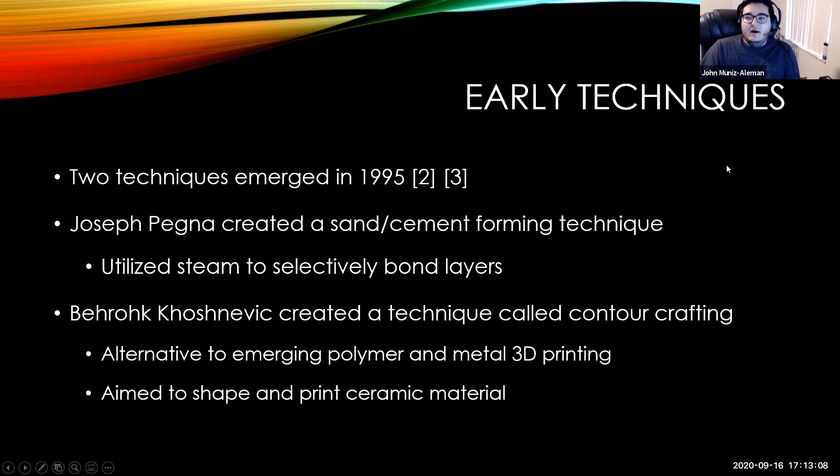Behrokh Khoshnevis instead came up with a technique called contour crafting. This came about at the time of early 3D printing with polymers and metals, and he made it as an alternative aimed at shaping ceramic material. Although he originally used it for ceramic materials, he saw its potential for material fabrication, especially for things larger than a cubic meter. It'd be a lot easier to just print something instead of making forms for, say, a building or something. So in 2000, he gathered a team at University of Southern California to begin studying how to expand the scale of his construction printing, which he aptly named 3DCP.

I have a short segment of a TED Talk from Khoshnevis in California back in 2012, in which he describes what contour crafting is. Let me make sure I share the computer sound.

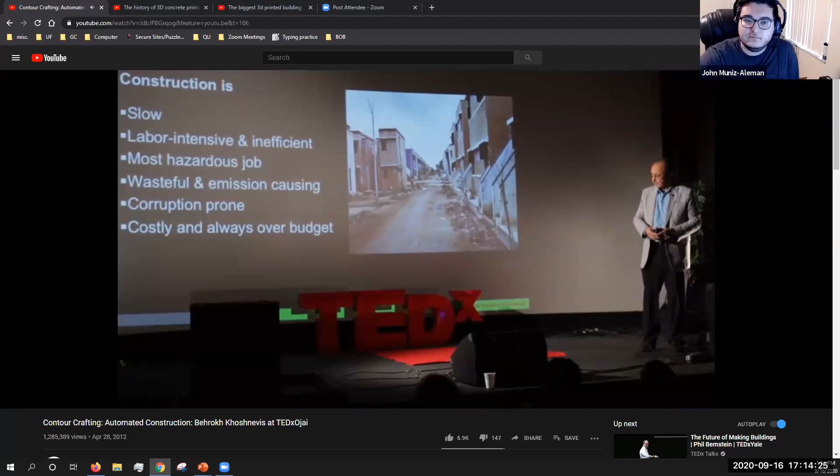There are about 400,000 injuries every year. Eventually these translate into costs to society and homeowners. Construction, the way it's done today, is very wasteful and generates a lot of emissions. And because of all the different trades involved and the difficulty of the management process in construction, the process is pretty corruption-prone. It is very costly and is always over budget. So what we have been focusing on is finding a solution to this problem.

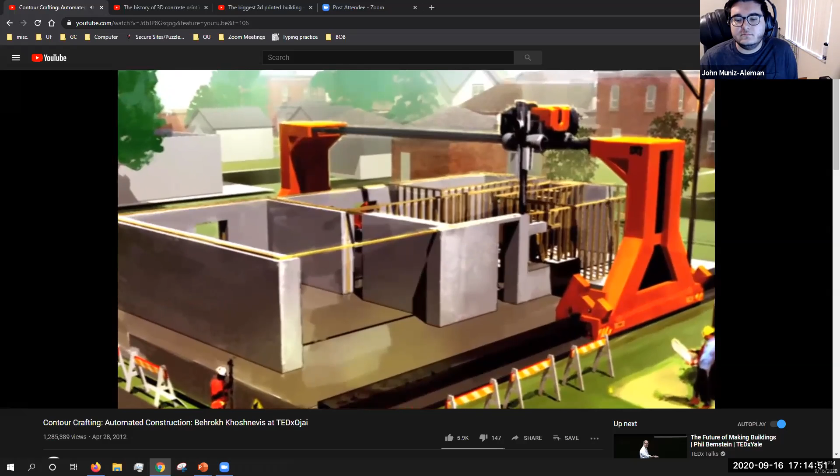Our solution basically benefits from advanced technology. I named this process contour crafting, and it is essentially a way of streamlining the process of construction by benefiting from the experience we have gained in the domain of manufacturing. In manufacturing, there's a process called CAD/CAM, computer-aided design, computer-aided manufacturing. A lot of things you see are designed on computer and, without any human interference, sent to the production machinery that automatically makes those products you use. So we want to scale up those processes and bring them to the realm of construction. This, of course, has been the desire of a lot of engineers and technologists. There have been problems, there have been difficulties in such a transition.

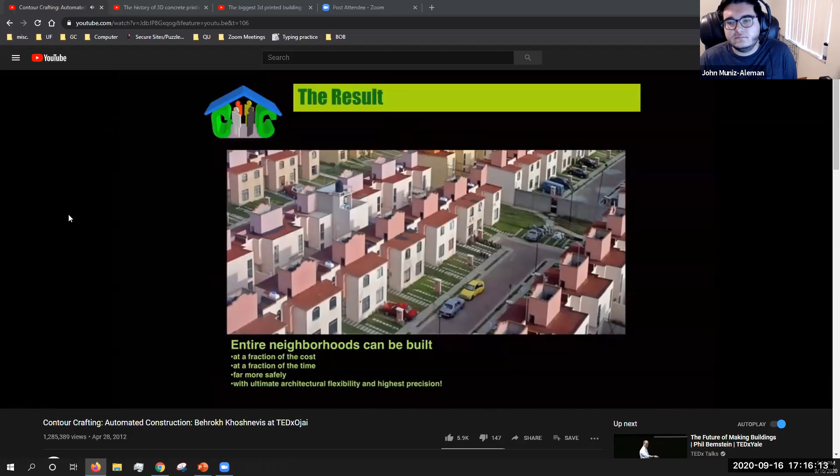Recently there has been development in the field of fabrication. You probably heard about 3D printing of 3D objects. So contour crafting is basically scaling up 3D printing to the scale of buildings. What we are hoping to generate are entire neighborhoods that are dignified, at a fraction of the cost, at a fraction of the time, far more safely, and with architectural flexibility that would be unprecedented.

So the buildings that will be built, of course, will not be as homogeneous as these. Every building can be very different. They do not have to look like tract houses because all you have to change is a computer program. The architectural design is basically sent to the machine directly.

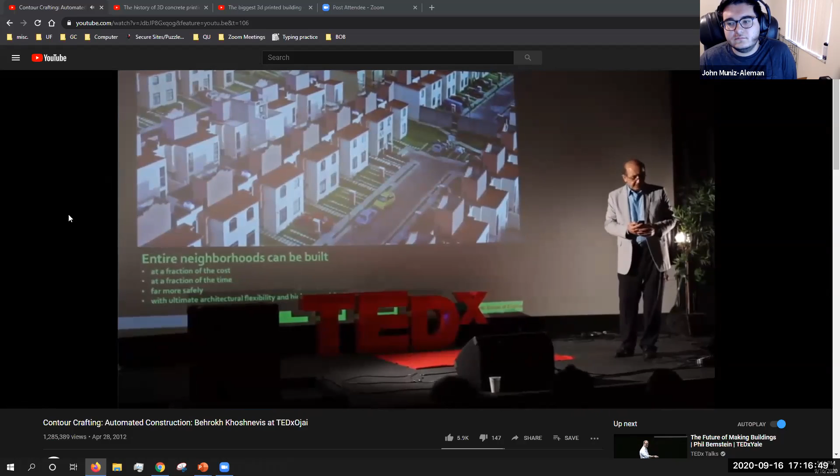This animation shows the concept. The material, which is cementitious, initially concrete, is deposited through a nozzle, and the building is built layer by layer. In the process, a lot of things can be done, including automatic reinforcement, automatic plumbing, automatic electrical network installation. And once the basic structure is done, there could be other automated processes that would do auxiliary operations such as finish work, tiling, and even painting using inkjet printers, the kind that print billboards.

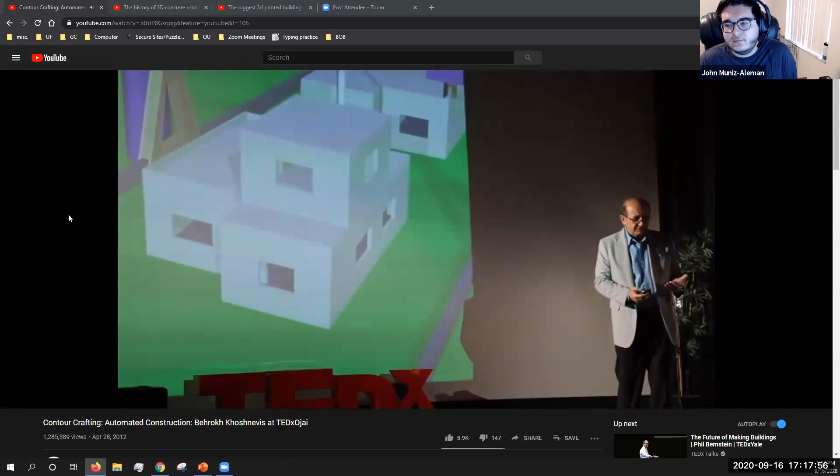So in the end, the whole building can be ready in an unprecedented time. We anticipate that an average house, like a 2,500 square foot house, can be built in about 20 hours, custom designed. The model you see here is pretty simplified because I didn't want to make the animation difficult for my students. But you can.

So I think that gives a pretty good overview of Khoshnevis's ideas on contour crafting and the basics of what 3D construction printing would be.

So, did not expect that.

Going on to the first generation of the technology actually being used: in 2003, Rupert Soar formed a construction group at Loughborough University in the UK. His group was studying how to scale up existing 3D printer techniques.

In 2005, he got the funding and was able to build an off-the-shelf printer. He used a gantry system, a generic concrete nozzle, and some motors to move it around on tracks.

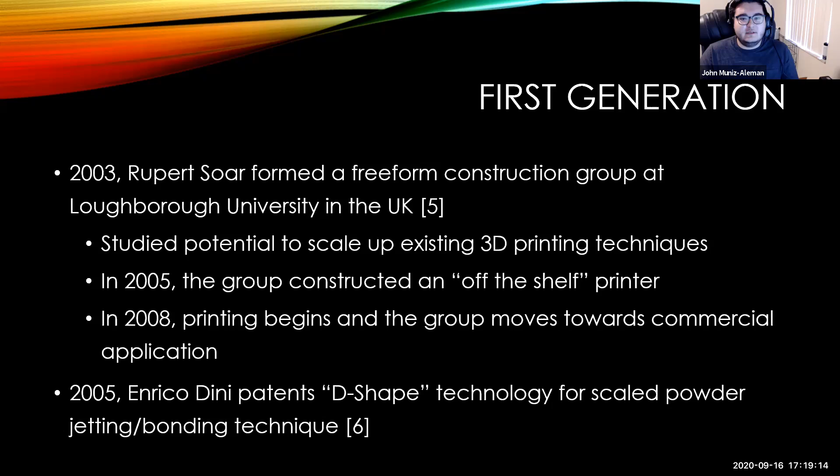Nowadays, Loughborough University was able to get a commercial grade printer, and they actually licensed it to Skanska in 2014 for use. Now all this has moved on to controlled applications and actual projects. So I have a little timeline video to summarize that, and a time lapse of the construction of an actual building. Let me get to that.

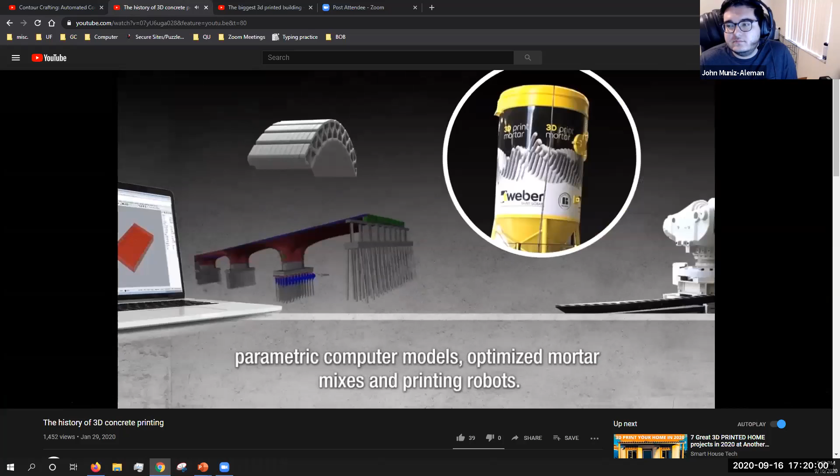Things started moving fast from there. The combined knowledge of BAM, Weber Beamix, and TU Eindhoven led to the development of parametric computer models, optimized mortar mixes, and printing robots. Shortly after, in 2017, this resulted in the world's first 3D printed concrete bridge. This 8-meter-long engineering feat was placed in Gemert, the Netherlands, and was extensively covered by media across the globe.

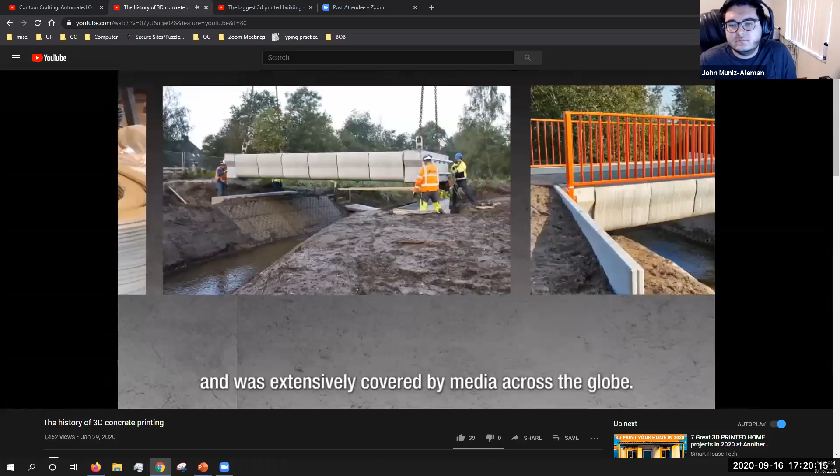No more than a year later, the equally newsworthy Milestone Housing Project was revealed, a series of 3D printed houses in Eindhoven. With this, a whole realm of new possibilities opened up for the 3D printing market.

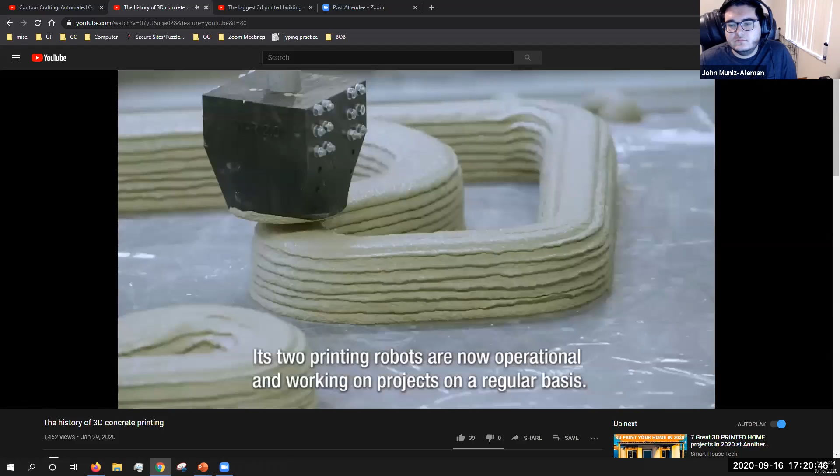Another big milestone followed in 2019, when BAM and Weber Beamix opened the first industrial and commercial 3D concrete printing facility. Its 2 printing robots are now operational and working on projects on a regular basis. In the meantime, the factory intensifies the digitization of the complete design-to-realization process. Call this process digital manufacturing.

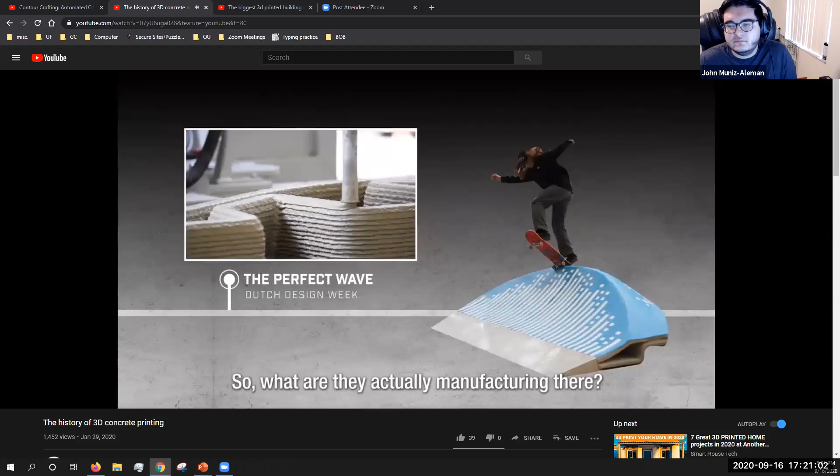So what are they actually manufacturing there? One of its more recent projects was the Perfect Wave, a skateboard ramp produced for the Dutch Design Week in Eindhoven, demonstrating how the process creates freedom for designers.

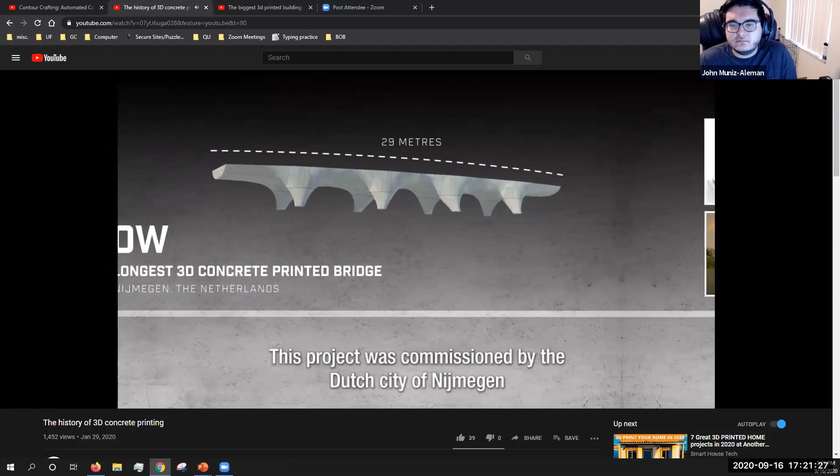Currently, the factory is working on another first-in-the-world project: the longest 3D printed concrete bridge in the world. It stretches an unprecedented 29 meters. This project was commissioned by the Dutch city of Nijmegen and designed by renowned designer Michiel van der Kley. It consists of separately printed elements which will be assembled on site - a daring and complex project which involves substantial experimenting and testing.

3D concrete printing is not just beneficial for big, audacious projects. For normal routine jobs, this technology can save substantial amounts of time, costs, and waste - like the stairs we printed for ProRail. The parametric model allows easy adjustment to each unique situation and is delivered to site as a prefabricated, ready-to-place object, or the formwork of concrete objects for the train station of Driebergen-Zeist.

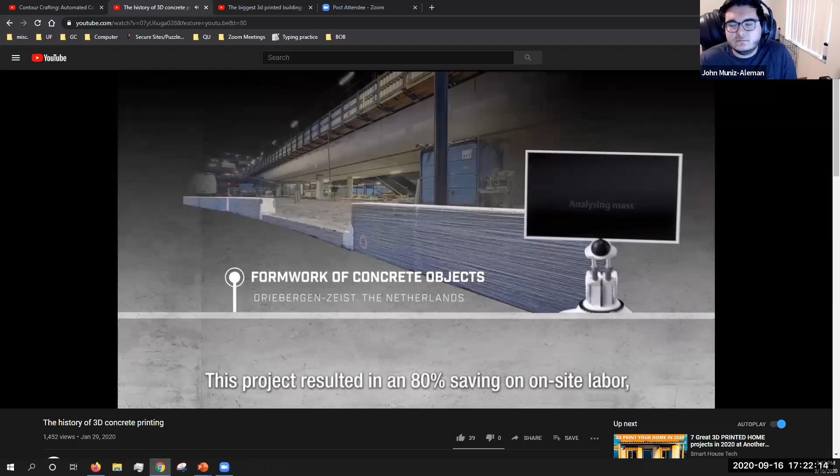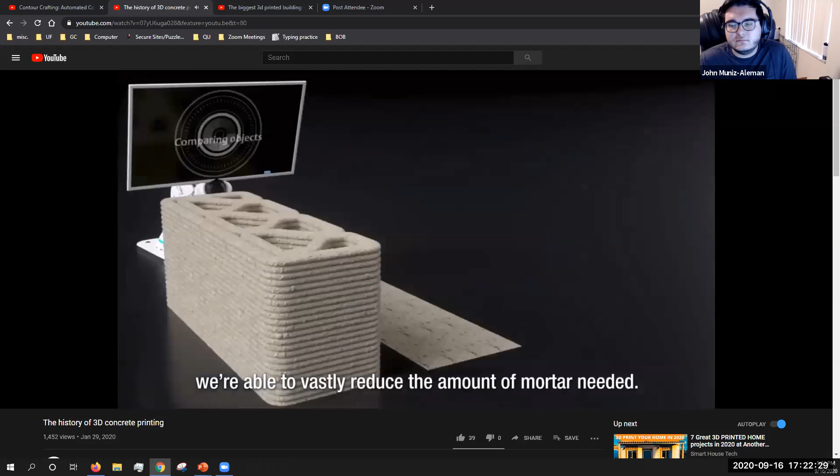This project resulted in an 80% saving on on-site labor and 60% saving on process time on site at no additional cost. Because concrete is only printed where it's needed for the construction, we're able to vastly reduce the amount of mortar needed. And since there's no more need to make molds or casts, we can minimize waste.

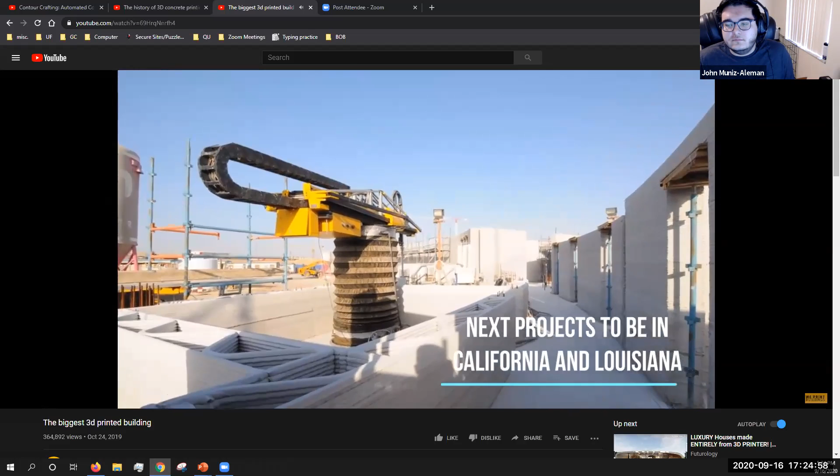So that's the end of my presentation on 3D construction printing and/or 3D concrete printing. Does anybody have any questions?

So I have a quick question for you, John. It looks like a beautiful technology, 3D printing, and also all the other technologies people have been talking about, automation, robotics. They look amazing, and from the data they could save up to 30-40% of productivity. But why does it still take so long for industries to use them? What is the major bottleneck - scalability, safety, or just pure psychology?

This technology has only really been in production for the last 10 years, so a lot of it's still being fine-tuned.

As you saw, that building in the most recent video was built by one small machine. I'm sure if you watch the rest of the TEDx talk by Khoshnevis, he introduces systems on rails with multiple extruders to scale up and build apartment buildings with multiple printers going at the same time.

I think right now it's just trying to get all the technology to where it needs to be, and the safety standards, because while 3D printing concrete is good and very quick, depending on the area—like here in Florida with hurricanes, or with earthquakes—you definitely need to make sure the reinforcements are proper, since it's not a solid block of concrete anymore, it's 3D printed and hollow. So I think it's still in the growing stages. I imagine in the next decade or so we'll see a lot more building, especially since we need to be able to build houses faster with the growing population. So that's my opinion on why it's not as widespread.

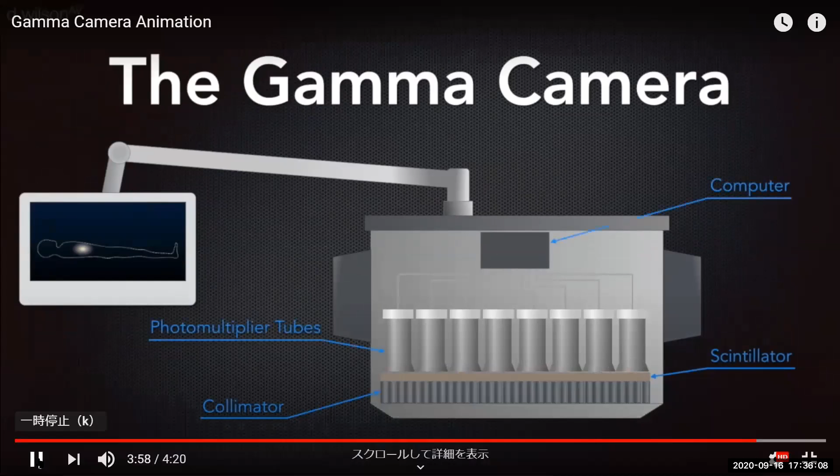So the video just showed us the general concept of how the gamma camera works, and now if we can go to the presentation—so just like gamma rays, it uses a kind of filter with some materials that filtrate these gamma rays and then translate it to an image. Can we go to the next slide?

After that—I think it's frozen, yeah—after that, the gamma camera has been commercially available since 1962, and then computers have been utilized in scintigraphic scans since 1964. Between 1965 and 1974, multiple different centers started developing their own computer programs. And after 1974, computers with incorporated nuclear medicine software packages became commercially available.

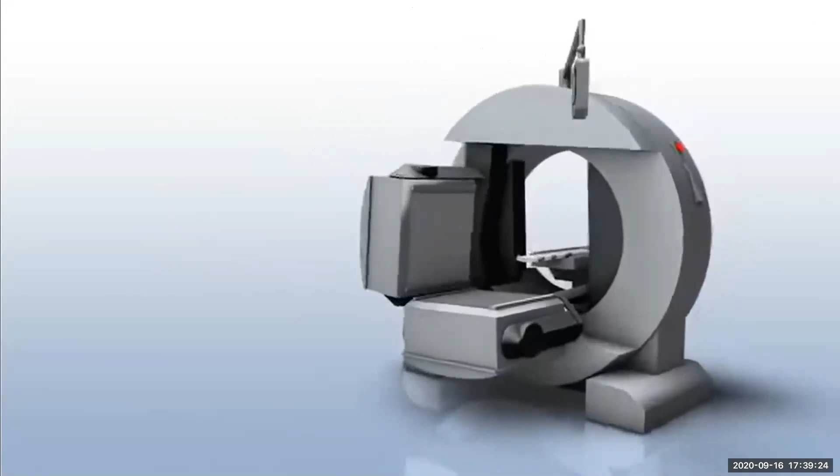If we can skip the introduction, this is the device: a gamma camera system with superb resolution and uniformity properties, making it suitable for the entire spectrum of nuclear medicine diagnostics. The robust open gantry requires little space due to its compact design and allows for high patient throughput.

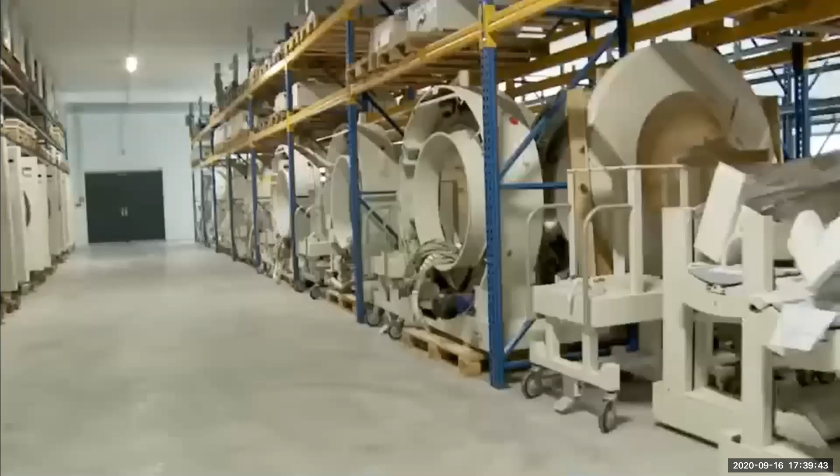The Scintron computer is a powerful data and image processing system that guarantees effective work due to its optimized user interface. The new gamma camera systems are designed in a complex process based on remanufactured equipment, new crystals, and a new computer system.

The individual components are designed for different life cycles, are manufactured, and the visible parts are painted. After the replacement of worn parts, the complete system is assembled.

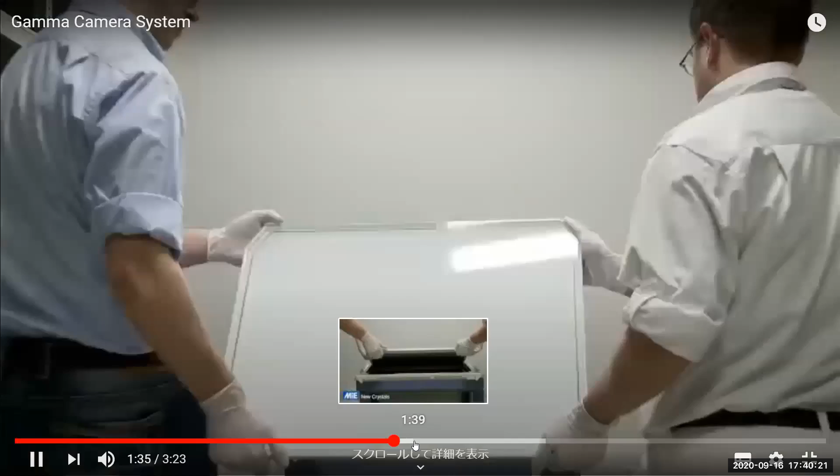The configuration and calibration of the detectors are essential for image quality. In this sensitive area, passive components are cleaned and detector electronics are tested. One of the most important steps is the renewal, which guarantees high image uniformity, using selected photo multipliers.

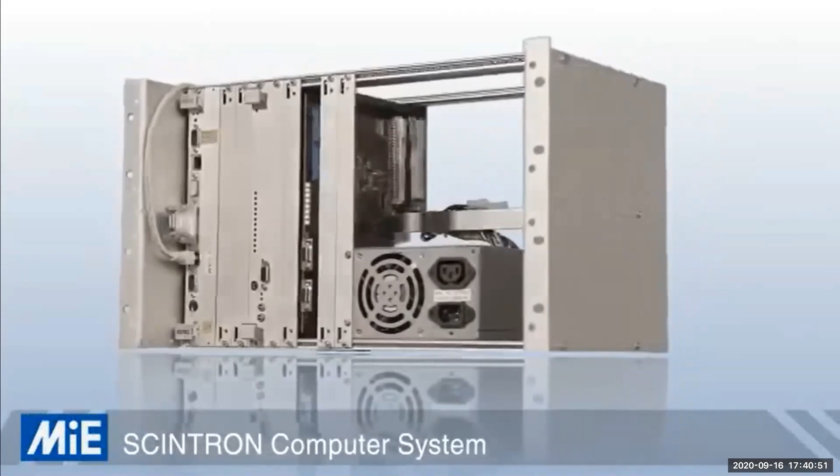Schematics, PCB layouts, source codes, and graphical user interfaces are developed in accordance with functional specifications. With the aid of these developments, the Scintron computer system controls the acquisition, analysis, and processing of image data. The entire examination spectrum can be conducted with the extensive software package, designed for nuclear medicine.

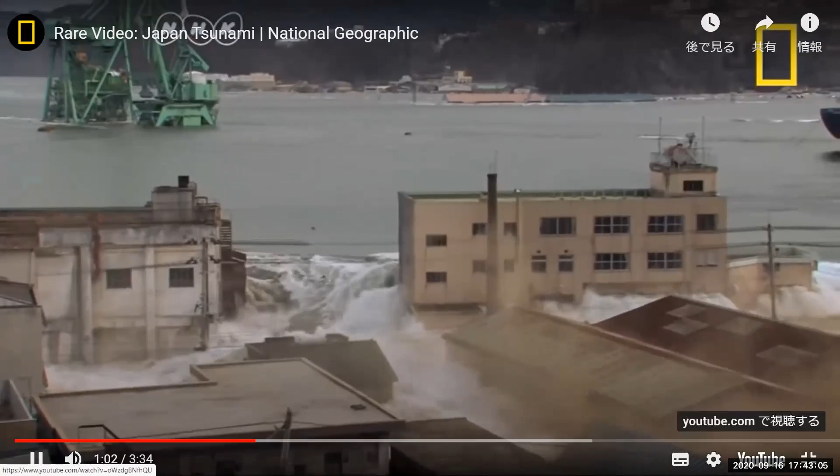Seawater cascaded over sea walls and into cities. This video shows water rushing over an 18-foot seawall into Kamaishi City. The seawall here was the world's deepest and largest, but not enough for the magnitude of the March 11 disaster. It was the largest quake ever known in Japan, and one of the five largest recorded in the world. More than 28,000 people are confirmed dead or missing.

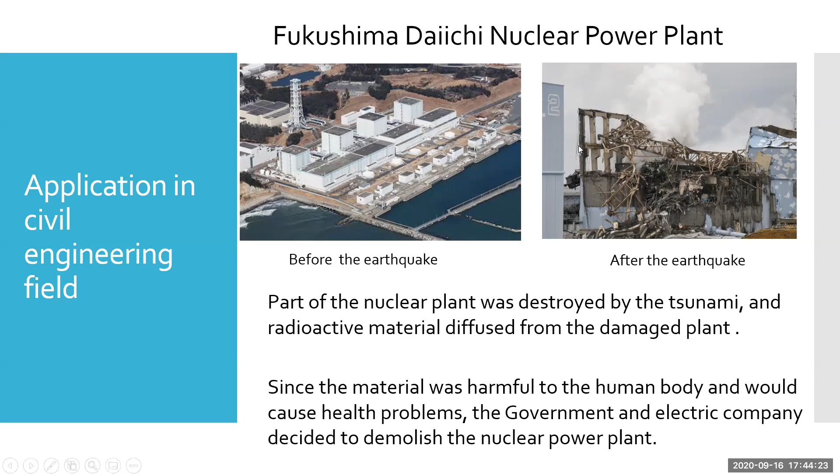So the government decided to demolish the nuclear plant. The left-hand side shows before the earthquake, and the right-hand side shows after the earthquake. The project will be long-term, like the Chernobyl disaster in 1986, due to the contamination of the buildings or area. For proceeding with the project, there are three problems.

The first is workers' health: accumulation of radiation exposure will eventually cause health problems like cancer. The second is safety: to prevent radiation exposure, workers can only do their job in a limited time. Last is management: to proceed and manage the project safely, measurement of the radiation is needed. For these reasons, the gamma camera technique was the solution for visualizing and evaluating the level of radiation in the buildings.

This is called N-Visage. It is the gamma camera which is used in the ongoing project in the nuclear plant.

The camera can visualize the level of radiation like this picture, and operate remotely and work in high radiation environments. So this is the benefit of this camera, and people can see how much the building is contaminated by

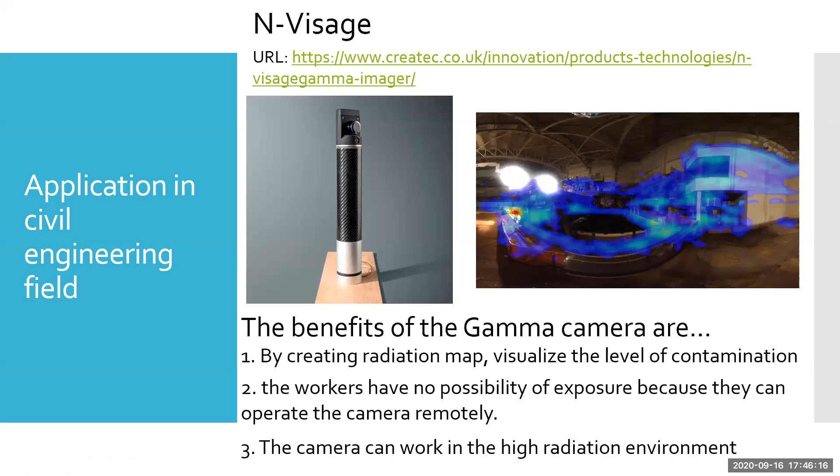radioactive material or radiation. So by combining robotic technologies shown on the video, this is a video actually working in the Fukushima Daiichi nuclear plant. The center of the image is the moving of the robot and the N-Visage.

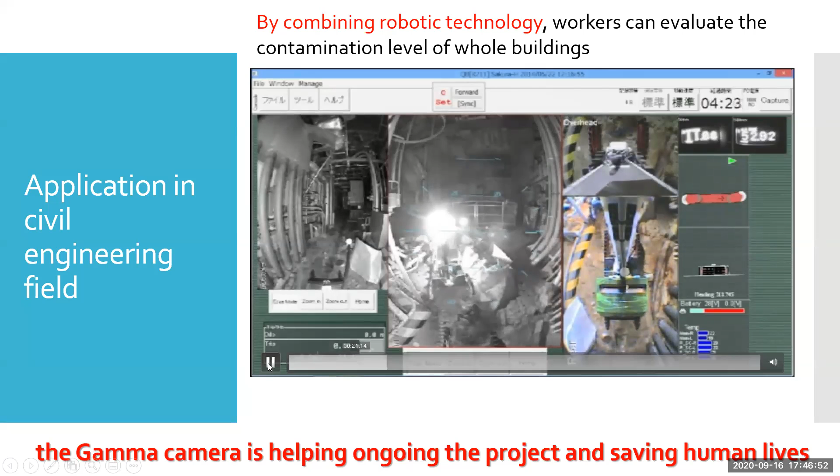So basically, the gamma camera was used to detect the radiation level and to make sure it's safe for people to re-enter, right? Yes. Okay, all right, thank you.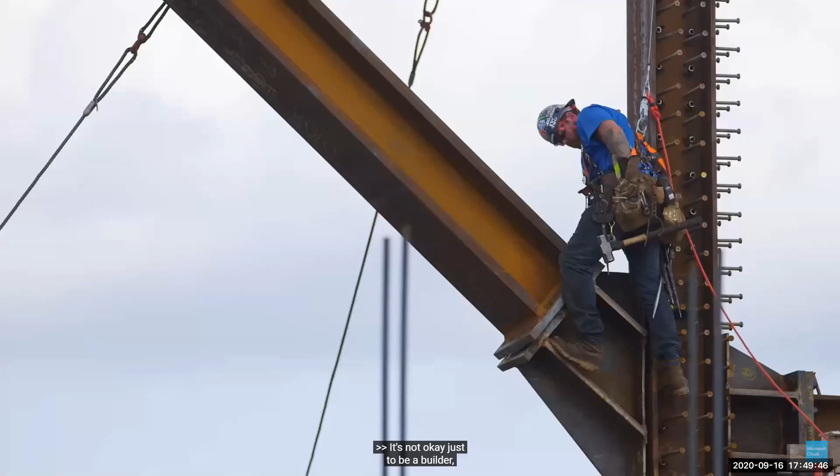It's not okay just to be a builder. We need to understand the development aspect in the early stages, the construction, post-construction, and frankly how the building is being used by its occupants. Four years ago, we had a four-pronged digital strategy that involved migrating to cloud compute, business intelligence and analytics, smart integration, and mobility. Microsoft and its Azure technology and platform have been a game changer for us relative to driving that strategy.

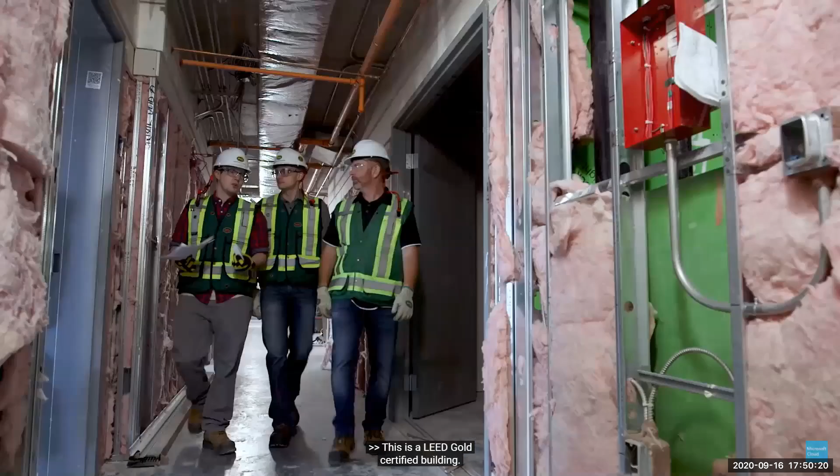The Stantec Tower is an iconic project. It is the tallest building outside of Toronto in Canada. This is a LEED Gold certified building. We've relied on technology to implement our construction planning, from virtual reality, 4D scheduling, and HoloLens technology.

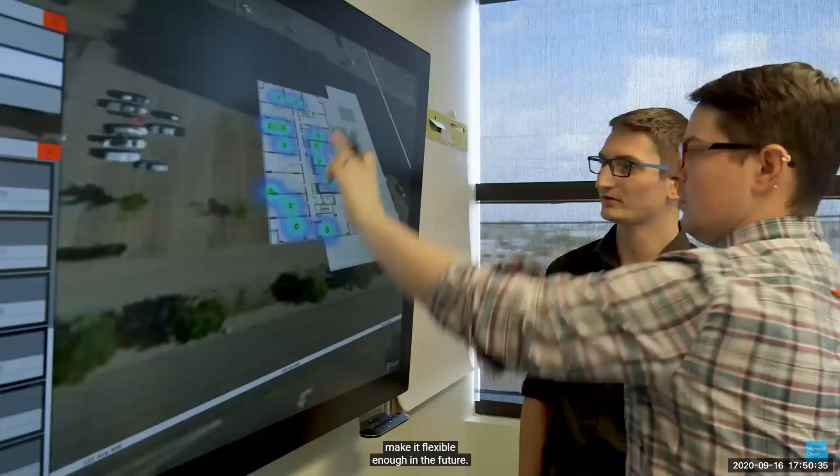A smart building is a win-win for the owner, the operator, and the tenant. You're putting in the core infrastructure to make it flexible enough in the future. PCL created JobSite Insights, an IoT-based smart construction platform based off of Microsoft Azure, Azure Digital Twin, and Azure Maps technologies. It starts with instrumenting a job site with various IoT sensors, and then streaming that data in real time through the lifetime of the project.

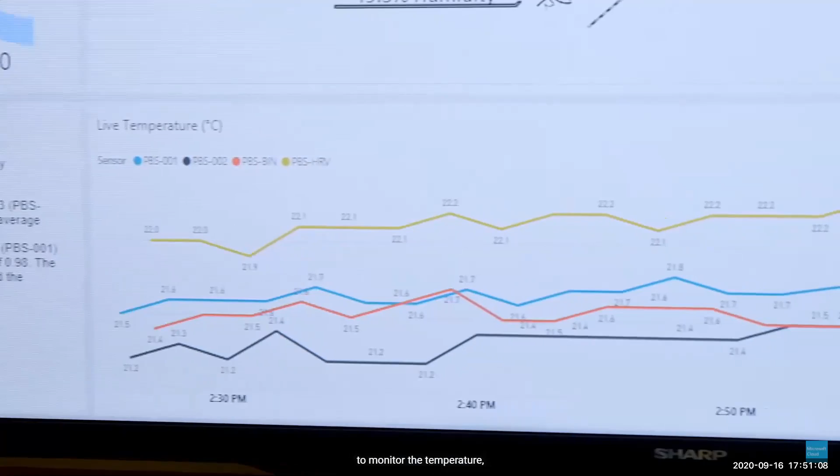The platform actually gives us physical hotspots in the building. They show red areas, which will drive us to go to that area and find out what the problem is. In a building this size, we're relying on our JobSite Insights platform to monitor the temperature, humidity, and pressure in 483 units. That's something that would normally be done by hand.

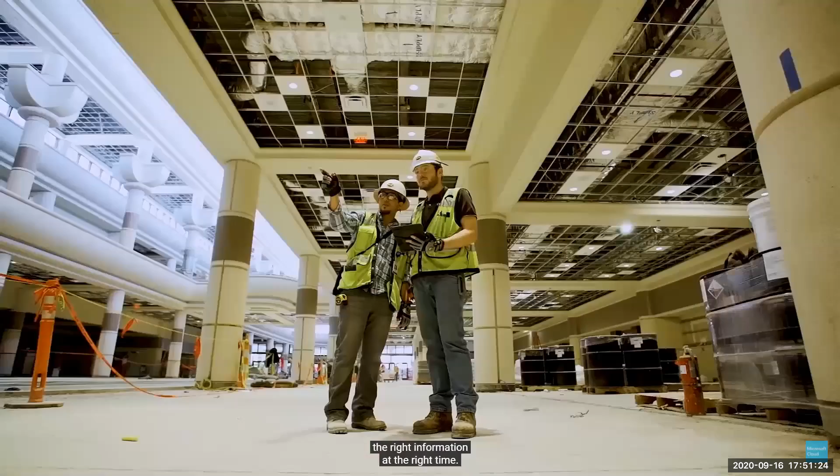Our cloud-based information is more readily available. It facilitates collaboration, so we can have all interested parties with the right information at the right time. By gathering data from sensors instead of people, we can focus those people on more effective and efficient things that drive value back to our owner.

PCL spends 200 to 300 million dollars a year on energy. With JobSite Insights, we anticipate 15 to 20 percent savings just in fuel and electricity costs. We have a significant opportunity to change the face of construction through the use of digital technology. Without the cloud, we would not have been able to do the things that we're doing today. As we continue to drive along our digital journey, Microsoft's going to be a critical partner for us in our evolution.

Okay, now we see that these construction industry problems where the productivity is low, we are using or partnering with the software industry to solve these problems.

And this is all using IoT sensors, which provide real-time information of what is happening in the job site. So this reduces the time the field team uses in manually taking out the temperature readings, the pressure, or the humidity in the job site. Instead of that, they can use their valuable time working on valuable tasks or activities.

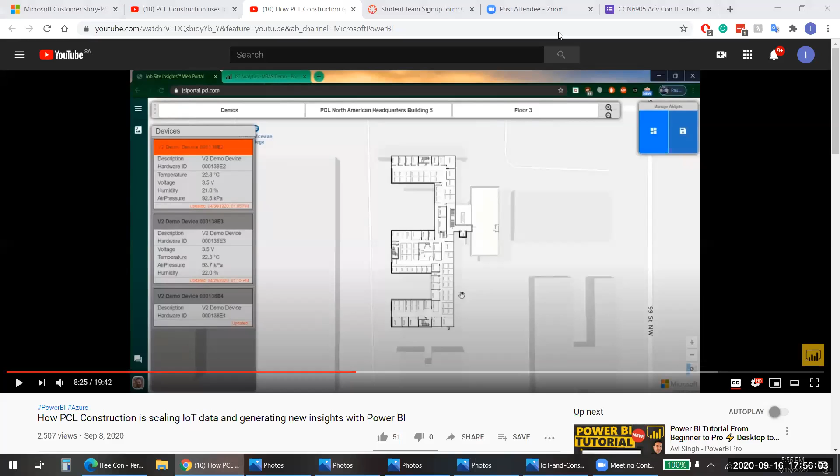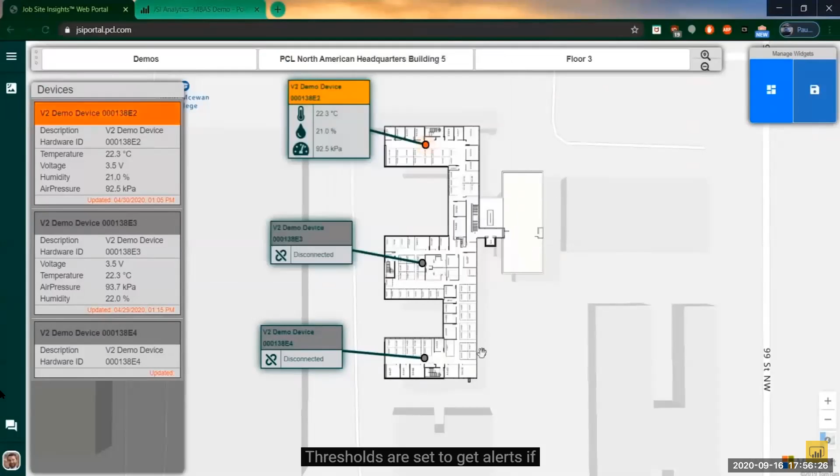Users can navigate across various districts, job sites, and floors or areas to view the latest sensor readings available. Teams can be configured to give access to other employees and set up alerts or alarms. Alerts and alarms are set on sensors or groups of sensors. Thresholds are set to get alerts if sensor readings go out of these bounds. These alarms will send alerts to the employees through various methods such as text messages or email.

The great thing about IoT is that there's a sensor for everything. JobSite Insights supports many different types of sensors, typical run-of-the-mill sensors like temperature, humidity, and air pressure, to more construction-focused sensors like concrete strength and maturity, as well as pipeline pressure and valve states. The first benefit of having all these IoT sensors is that no more manual readings need to be taken anymore. Before, job sites that needed to ensure their environments were controlled had an employee go from area to area physically taking measurements. The second and more important benefit, though, is that it gives us greater control over the quality of our final construction product.

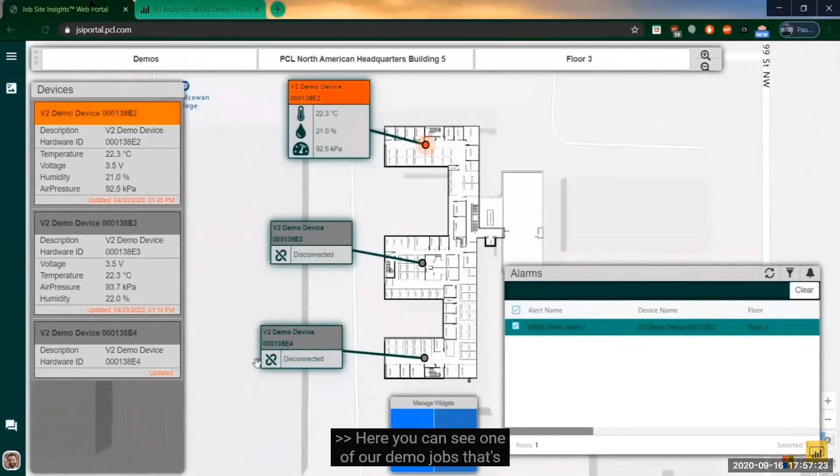So here you can see one of our demo job sites with a few simple sensor types. Employees can open the application to see the current environment of the job site from anywhere and determine if they need to physically go to locations if anything seems off. On this application, any sensors that have active alarms will show up in red. Alerts will also have been sent to the employees directly so they can act as soon as the alarm is triggered.

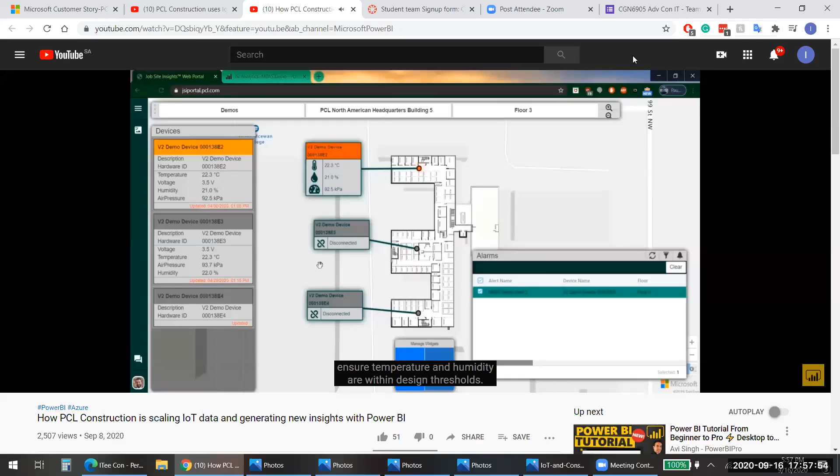A good example of this is on job sites where millwork is being performed. This work must be done and kept in a controlled environment to ensure temperature and humidity are within design thresholds. If these values do fall out of range, employees can act quickly, preventing damage and additional costs to our company.

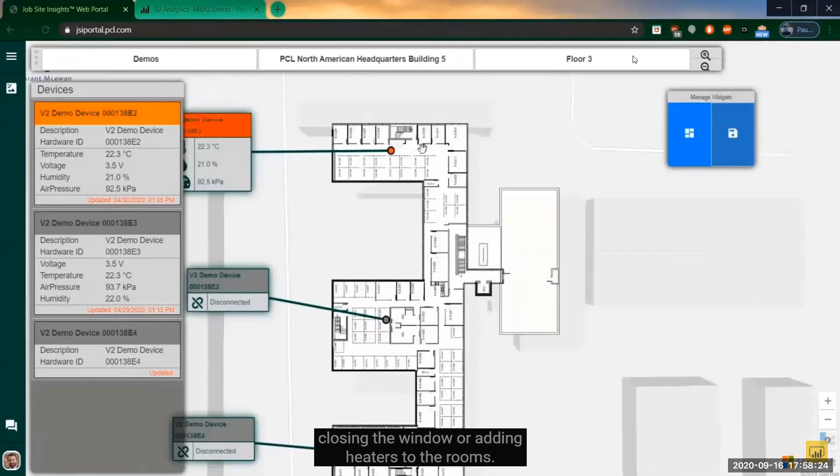A common problem when working on towers in the winter are pipes freezing and bursting, which can cause water damage to units below the burst pipe. Employees now can be alerted to the problem and address it quickly, or they can take preventative measures like closing a window or adding heaters to the rooms. This simple act can prevent large amounts of rework and additional costs to the project.

Since job sites are constantly changing, sometimes it's not feasible to plan for every possible risk. During construction, it's easy for water to find its way into areas it's not supposed to go, and that could be due to heavy rains or melting snow. Rather than installing and then removing pumps over and over again in areas that need water protection as construction progresses, we can use flood sensors to save the project money by allowing them to only install temporary water mitigation systems as needed, once they're notified of water in a particular area.

So all these alarms can be viewed and tracked in the JSI application itself. Alarms will show up in red, as you can see here with this one demo device, and users can deal with them in real life, and then once they're done, they can go back to the application and clear these alarms to ensure that we know the issue has been dealt with and nothing is outstanding, and we're not going to have any further problems there.

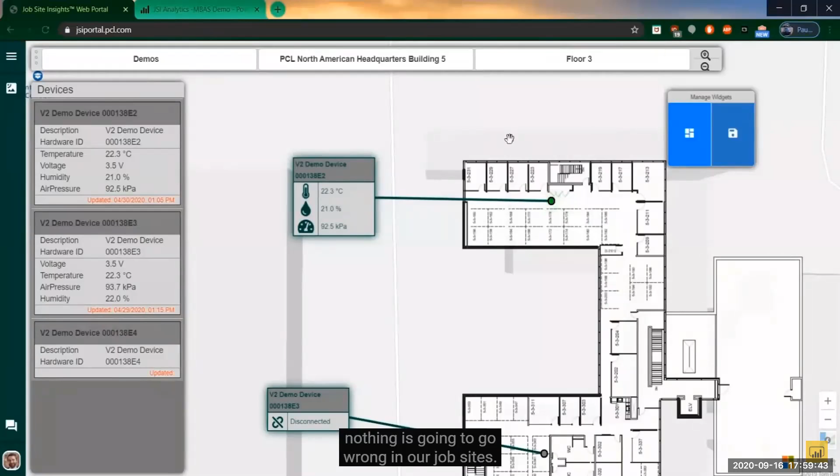If the device goes out of bounds again, we'll get another alarm, and we can make sure that further plans can be implemented so nothing's going to go wrong on our job sites. So now you've just had a quick view into the JSI application itself. I'll switch over to JSI Analytics, and we can have a look at the historical data JSI and its sensors have generated.

The Power BI dashboard offers a view into aggregated summaries of the data, along with detailed data down to each individual sensor reading. The main dashboard shows the available sensor types. Users can set the time span of the data they want to see, as well as selecting different job sites to view on this first page. Further slicers are available on an Options tab to filter specific areas or devices if needed.

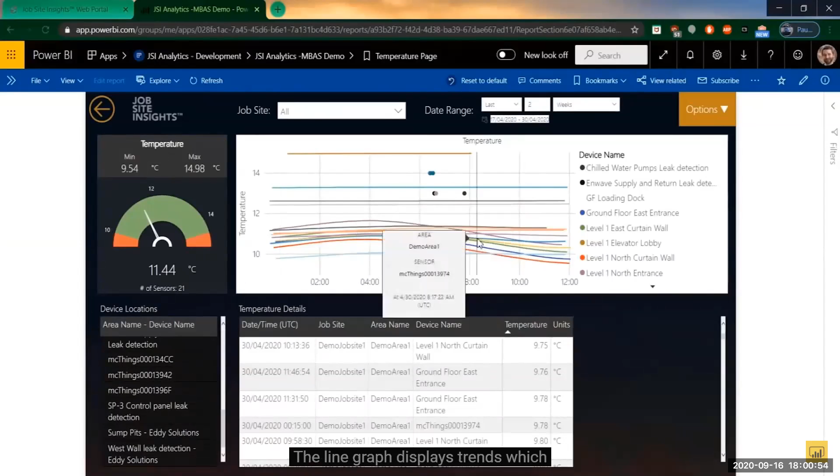Each detailed page provides an in-depth view into a particular sensor type. On this temperature page, there's a gauge showing the range of values experienced by the sensors, along with whether any values have fallen outside the thresholds that have been set. This page allows project teams to quickly review and identify any problems. The line graph displays trends which quickly highlight any anomalies that may have occurred. Teams actually use this dashboard extensively to ensure environmental conditions are met and sensitive areas are monitored.

On a construction site, like I said before, where things are constantly changing, having this information readily available to teams allows them to respond quickly and make informed decisions.

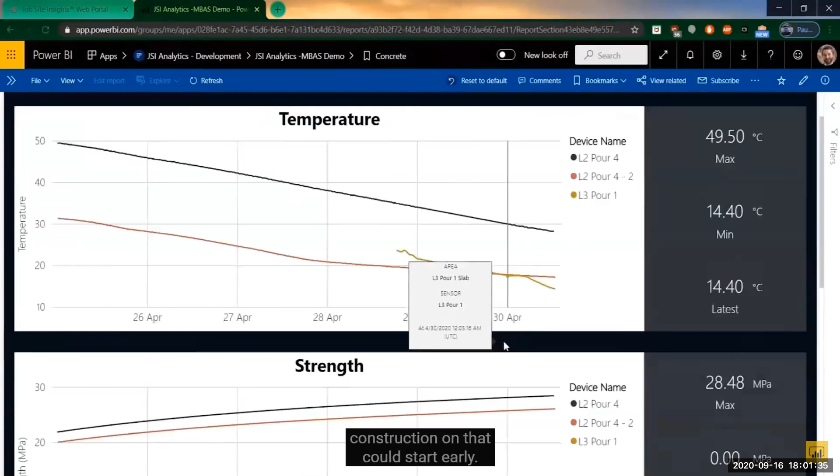One of the ways Job Site Insights has directly improved productivity is being able to monitor concrete strength and maturity once it's being poured. If teams know exactly when the concrete has cured and is ready to be built on, construction can start early. This saves days off the schedule, reduces equipment and labor costs, and ultimately makes the projects more profitable.

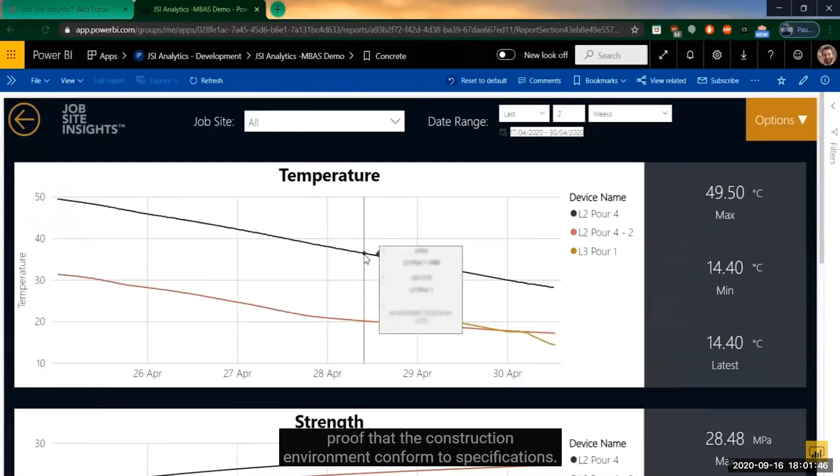Another way Job Site Insights has proved its value is when we need to provide proof that the construction environment conformed to specifications. If millwork is cracked and clients are claiming that environmental conditions are the cause, we have all the historical data necessary to show that we did, in fact, maintain a proper environment.

Warranty work and claims can end up costing a lot of money after a project finishes, and JSI Analytics can minimize these costs. There are many other use cases for JSI Analytics and JSI itself as the system continues to expand. I hope this gives you a quick look at how we can use Azure and Power BI to help our business.

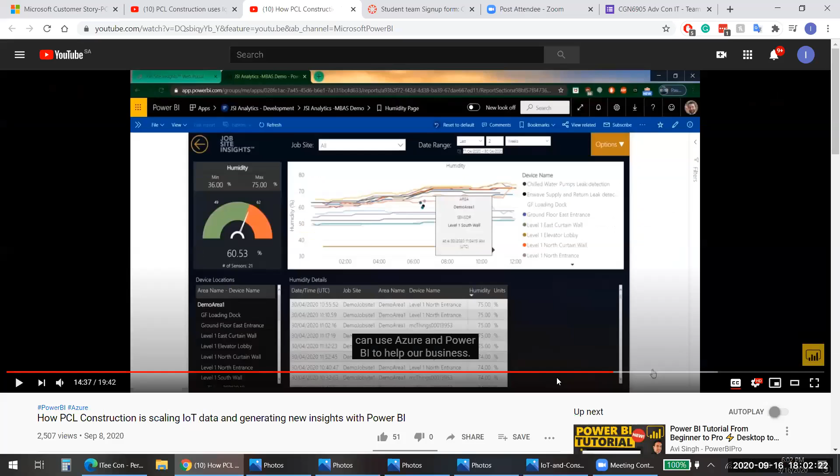Okay, so this is one of the applications from a PCL company. And this is an example from the sensor inside the concrete. It shows the temperature during the days.

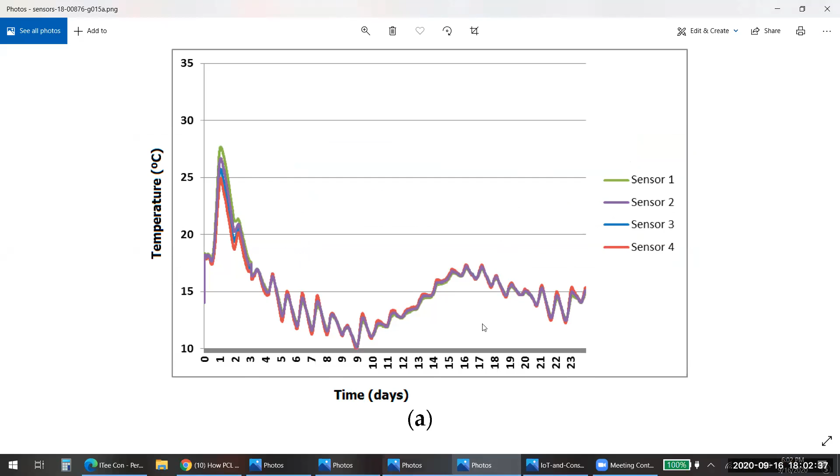It's really good. And also one of the sensors that can be used - some of them can be wearable. The workers can wear them, and it has many features - they can also measure their temperature. They can also measure their heart rate, which is also good for safety.

So can anybody tell me what are some of the benefits from using the sensor in construction? No one? Okay, I think this will enable faster response, right?

So if something is going wrong on the job site, instead of waiting for it to become a bigger problem, they can react really fast. And also, I guess I saw the sensors also have geo information, the location information, so it's probably easier for construction professionals, engineers, or maybe facility managers to find the right place fast. And also with this cloud computing function, I guess we can also have some remote intelligence - maybe it's easier for us to share real-time data with the technician without bringing them to the job site. They can just check all the information and see what's going on.

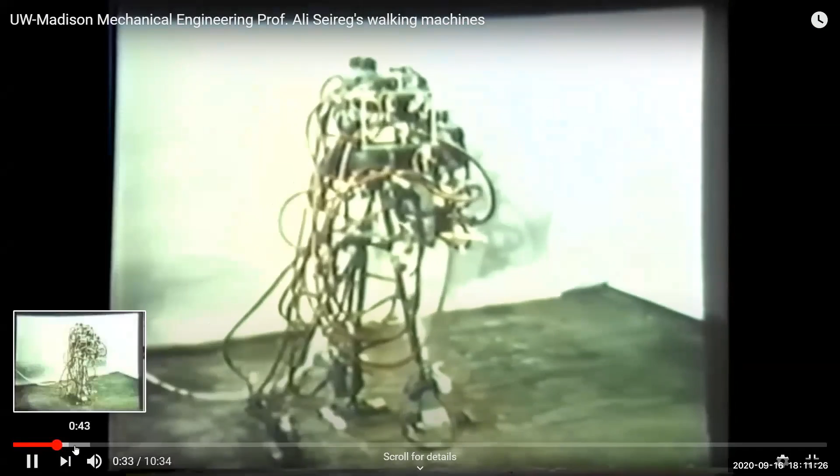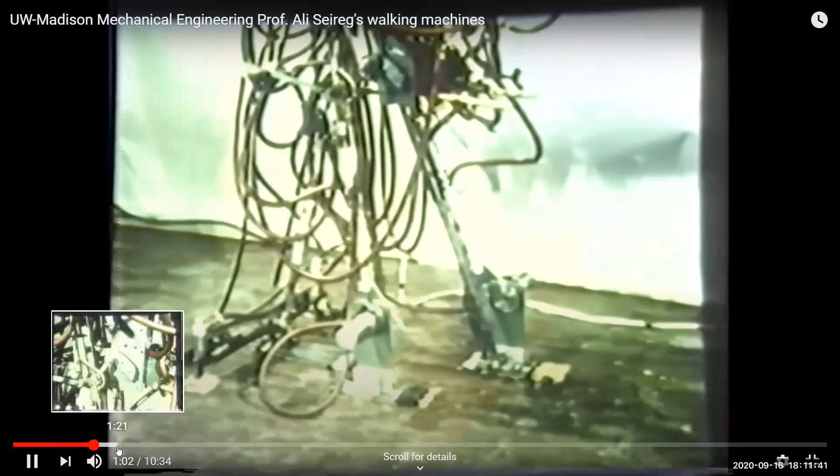The second robot is developed to investigate the feasibility of a powered exoskeleton for providing locomotion to non-ambulatory persons. The machine is designed for one-directional walking, and the motion pattern for all the joints is coordinated by cams mounted on a single cam shaft.

The exoskeleton interfaces with the patient at a steel-reinforced fiberglass corset, designed to support his weight with minimum interference with vital functions by gripping the abdomen just below the rib cage. The corset is then supported by leg brace frames formed from welded steel tubing. Special care is taken to fit the leg brace frames to the patient's leg without restrictions or binding.

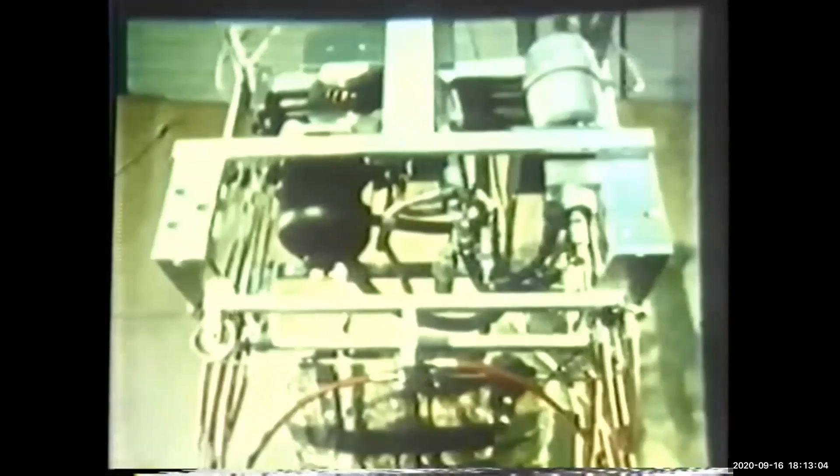Power is supplied by a 1/3 horsepower, 7,000 RPM DC motor mounted in the power box located on the back. Hydraulic and worm gear speed reductions, along with cams, rocker arms, and coaxial cables, generate the kinematic and power requirements to move the leg braces in a pre-designed walking pattern.

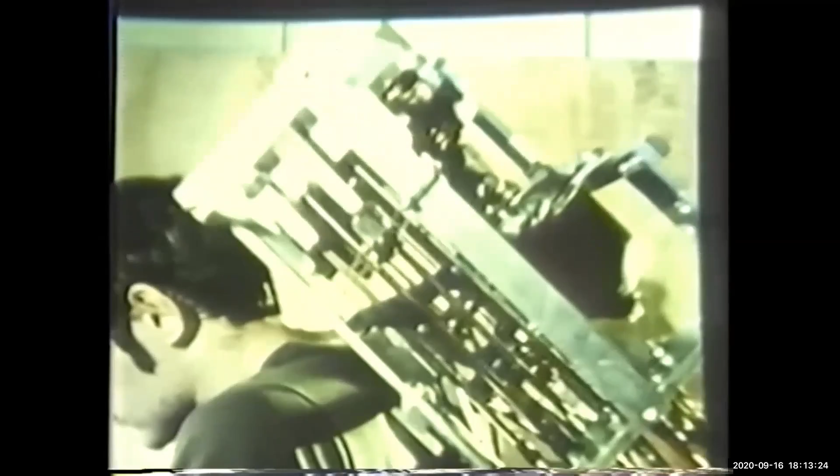To be useful for ambulation, the machine must also be able to provide sitting, climbing stairs, and stepping over obstacles under the patient's control. This can be accomplished with the help of computer control.

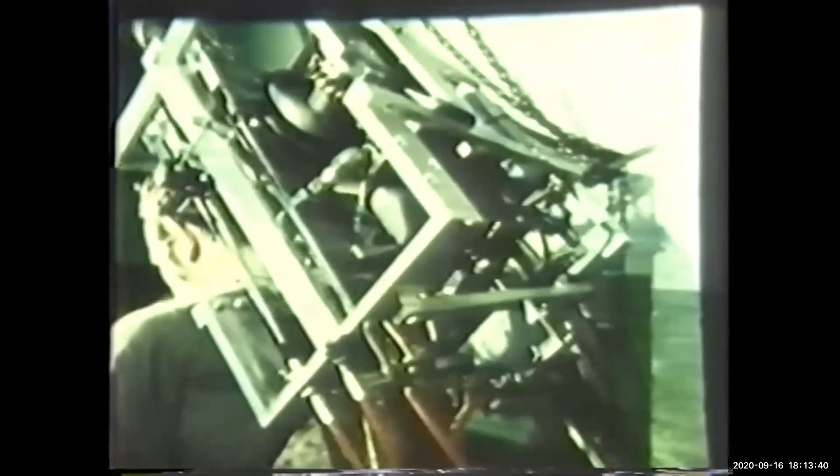The third walking machine was then developed to study the feasibility of a computer-controlled, multitask-powered exoskeleton for paraplegics. It is an extension of the previous walking device and provides computer-controlled, multitask capability under the patient's command. The different joints are powered by hydraulic actuators whose servo valves are driven by the operational amplifiers of a hybrid computer.

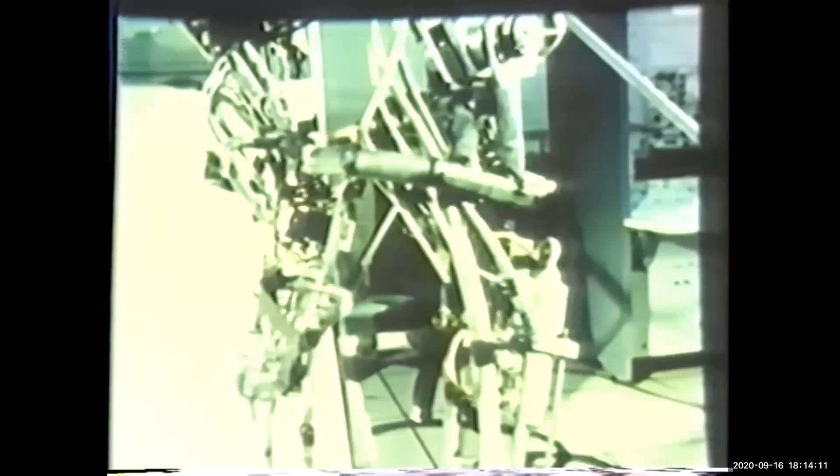The motion patterns are digitally stored in the computer, and the different actions can be executed at different speeds by activating the input control switches, which are mounted within reach of the patient.

Although a large hybrid computer was used in the developed prototype, the system is designed for control by a microcomputer no larger than 4 inches by 4 inches by 6 inches, to be carried in the power backpack. The ambulation task capabilities in this prototype are walking, sitting, standing, climbing stairs, and stepping over an obstacle.

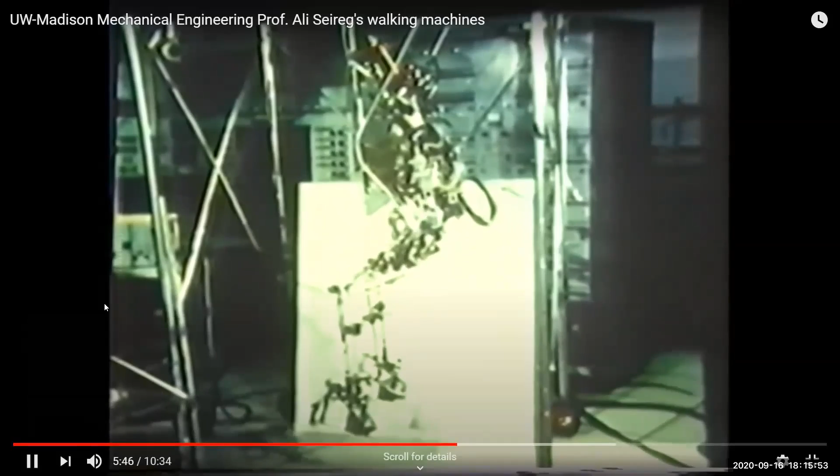This is slow motion execution of these tasks. First, you see slow walking with a short stride. Now the exoskeleton is sitting from a standing posture. Now it is standing up again. And this is the act of stepping over an obstacle.

This illustrates the motion of the different joints in the act of climbing steps. The climbing is done one step at a time, and the patient has to activate the system for each step.

Each joint in the exoskeleton is equipped with an angle sensor, and all the signals during any act are fed back to the computer to ensure that the actuators are performing as instructed, and if any error is detected, it is instantaneously corrected.

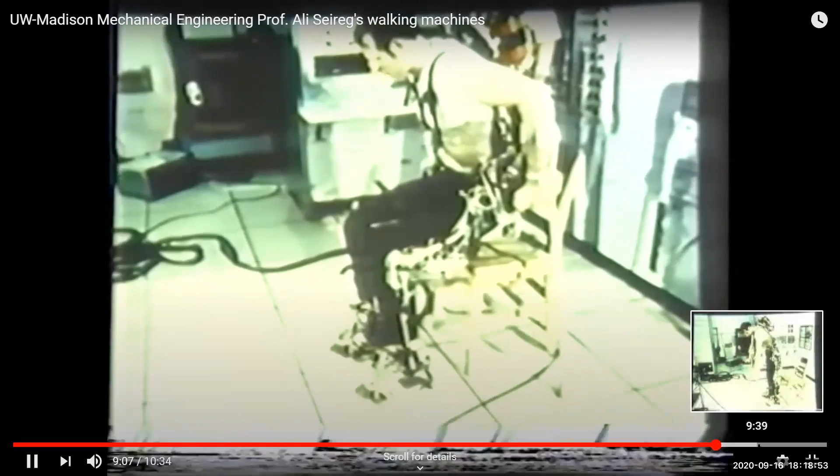Besides demonstrating the feasibility of powered exoskeletons for paraplegics, the developed prototype can be used in physical therapy to provide controlled exercise with graded assistance and to teach those with some muscular strength to walk again.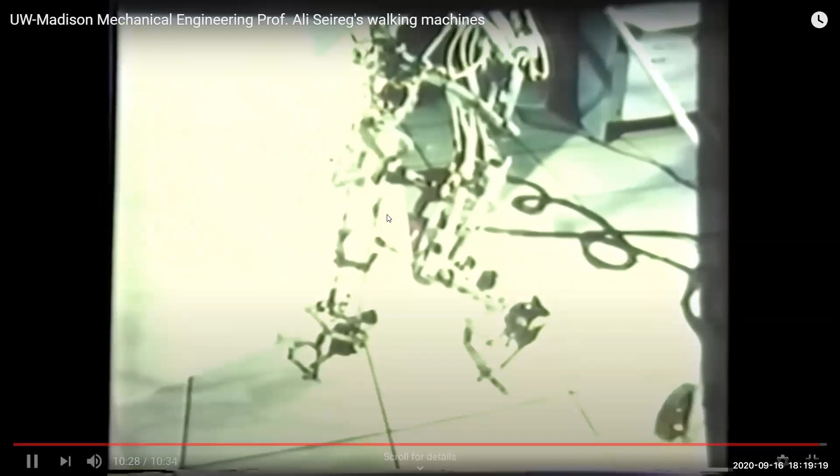So this was the use of exoskeleton in 1965, but around 2014, exoskeletons came into the construction industry, and there were many types of exoskeletons being used now, which contractors are using nowadays, such as the mounted arm exosuit, back support exosuit, arm support limb, crouching and standing support, and whole body suits.

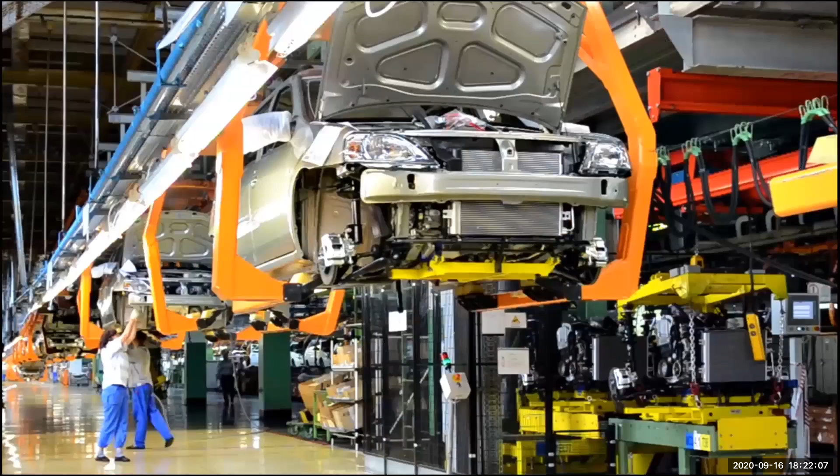No batteries, no cables, and it weighs under 10 pounds, so you can wear it comfortably all day. The EksoVest is perfect for a variety of overhead applications, like manufacturing, overhead drilling, laying pipe, and cutting and grinding. EksoWorks is sparking innovative change in the industrial space, providing power without pain. We can't wait to see what you'll do with it.

So guys, I have another question for you all. What's the most important thing that we as construction field people are lacking in construction? What are we lacking on basically? Maybe technology improvement. Technology improvement in construction, yeah, but we are not up to the scale in terms of productivity compared to other sectors, right?

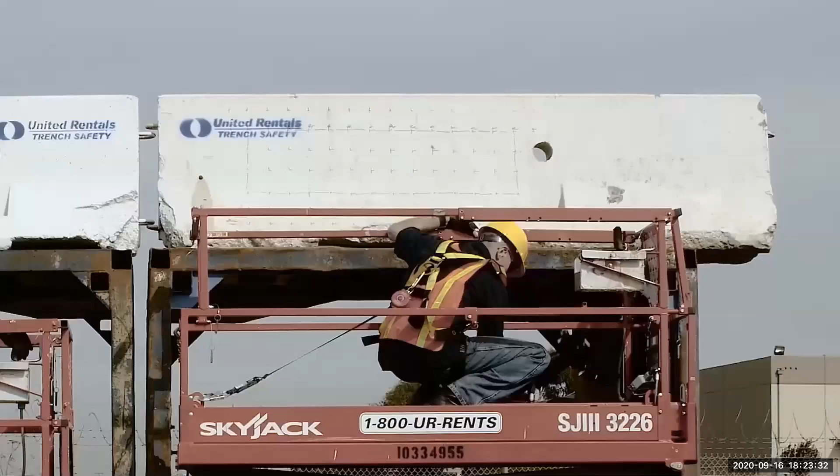So there's another video which explains how exoskeletons work. The rising cost of safety due to on-the-job injuries is killing our productivity, and that's where the EksoWorks aerial system comes in. With the patented zero-gravity arm, the use of heavy hand tools becomes almost effortless by rendering them weightless. We decided to put the Ekso Zero-G arm to the test to see if it could save time and money on the job site.

We gave the workers 2 identical drilling and chipping tasks. Dwayne will use traditional methods, while Ed will be assisted by the Ekso Zero-G arm. We will be monitoring the heart rate, time, and progress as both workers complete the task.

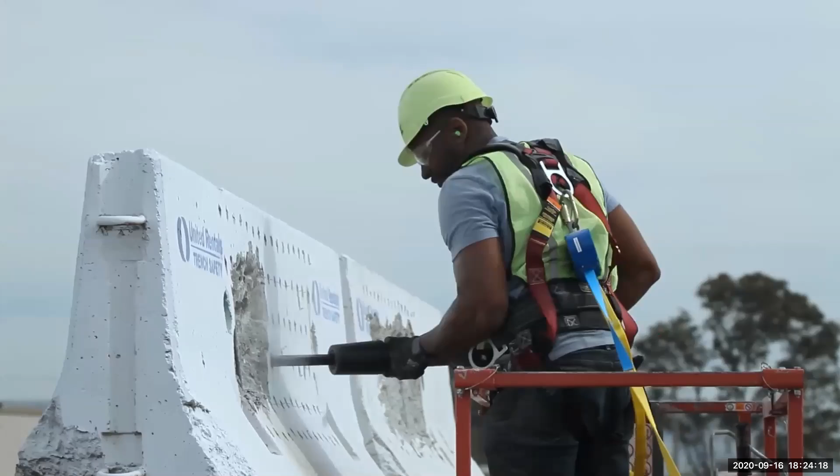The results are impressive. The Ekso Zero-G enabled worker finishes all the tasks while the other worker becomes too exhausted in the process. With the assistance of the Zero-G arm, the worker completes the task faster and with significantly less effort and fatigue. So what if you could complete your heavy hand tool task faster, with better accuracy and less injuries? Now you can with the EksoWorks aerial mount system.

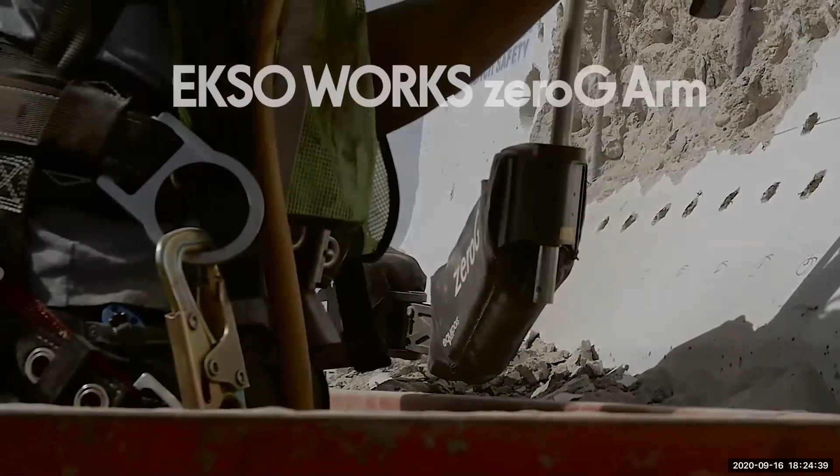So these are few of the benefits of using exoskeletons on site, and to be precise, more and more contractors are getting into this particular gist of using it. And it is said that by 2023, 33% of contractors will be engaged in using some wearables which will be useful in terms of increasing the productivity.

And even right now, it has been observed that using wearables such as exoskeletons on site could be beneficial for social distancing as well, because it's one of the prime aspects we are focusing on right now. So yeah, this is the future we are looking forward to. So that's it, any questions?

Just a quick comment. I think this use of exoskeleton is profound for the construction industry. I cannot hear your voice, Professor. Can you hear me now? Yes, we can, okay.

So it actually does improve productivity, and make it safer and healthier for the construction worker, but it could also potentially change the industry because it can broaden the population of the workforce. Think about that, usually it is considered that females are not suited for heavy labor tasks, but with exoskeleton, we can broaden their participation. And maybe for a disabled group, they might be, for the first time, able to work in this industry, right?